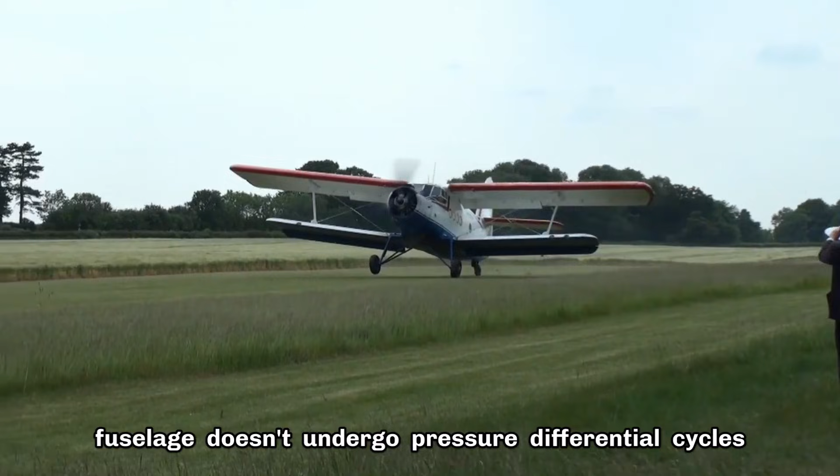If your budget is limited and you buy a general aviation plane or helicopter, you don't need to worry about lifespan because these fly at lower altitudes. They usually don't need to be pressurized, so the fuselage doesn't undergo pressure differential cycles from takeoff and landing. Just do regular maintenance and replace any parts that break. If something breaks, just swap it out. For example, the famous air tractor AN2, known as the Y5 in China. Many of the ones flying are old planes that might even be older than you, and they are considered workhorses.

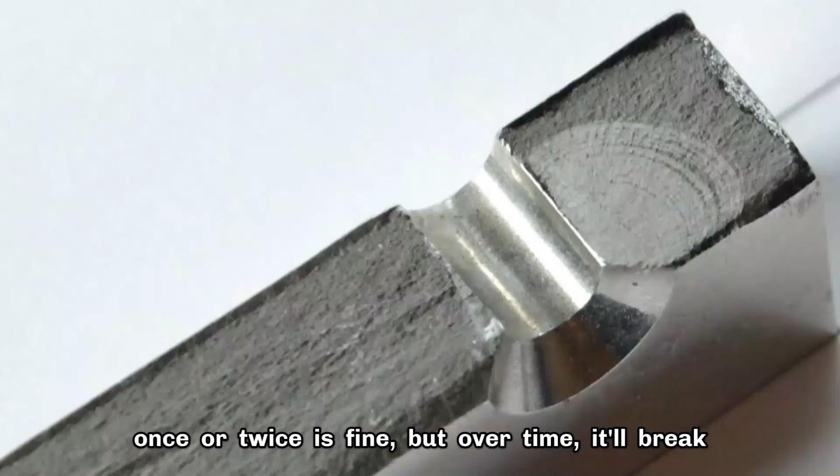But large commercial planes fly high and must be pressurized, so each takeoff causes the fuselage to expand, a process known as stress cycling. Material subjected to long-term or repeated loads develops small damages that gradually expand. In the end, it'll just snap with a crack. This is professionally referred to as material fatigue, or fatigue in English. Whether it's wood, rubber, plastic, aluminum alloy, or stainless steel, none can escape fatigue. Even if the stress of each cycle is far below the material's yield strength or ultimate stress, doing it once or twice is fine, but over time, it'll break.

Reading this, you might just burst into tears after coming home from overtime work. Even steel gets fatigued, let alone people.

Due to material fatigue, even regularly replacing parts or engines won't solve the fuselage fatigue issue. Unless you replace the fuselage, which raises a philosophical question: is a plane with a replaced fuselage still the same plane? Fatigue is a long-standing problem in mechanical design, whether in aviation, automobiles, or bridges. For instance, Delta Airlines in the United States lost the flaps of a Boeing 737 for 2 consecutive months in July and August. It's the first time I've seen a subscription-based flight accident. The reason for the flaps flying off is most likely metal fatigue.

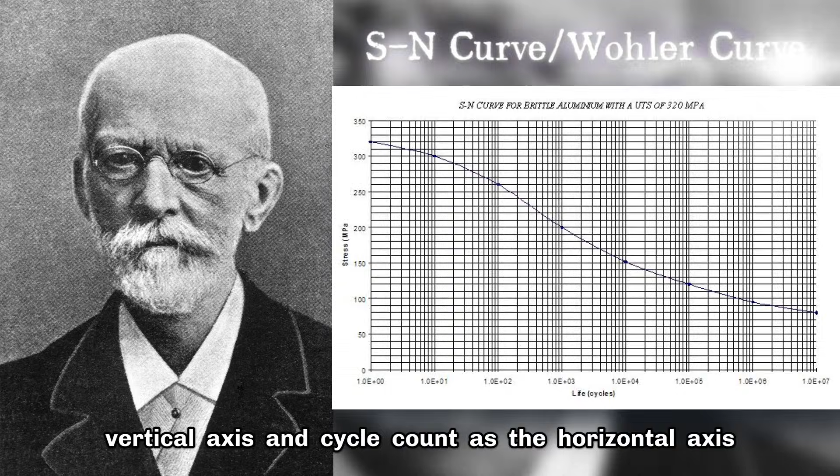Since the Industrial Revolution, engineers have been puzzled by train axles that break after a period of use. At the same time, they began a difficult search for answers. How long can this structure last before breaking? It wasn't until the mid-19th century that German engineer August Wöhler discovered that the lower the stress amplitude, the more cycles a material can withstand. He conducted numerous experiments and plotted the famous SN curve with stress amplitude as the vertical axis and cycle count as the horizontal axis. Over 100 years later, the SN curve remains the most basic and widely used method for fatigue analysis, especially for high cycle fatigue, which involves low stress cycles exceeding 10,000, and it has proven to be consistently reliable.

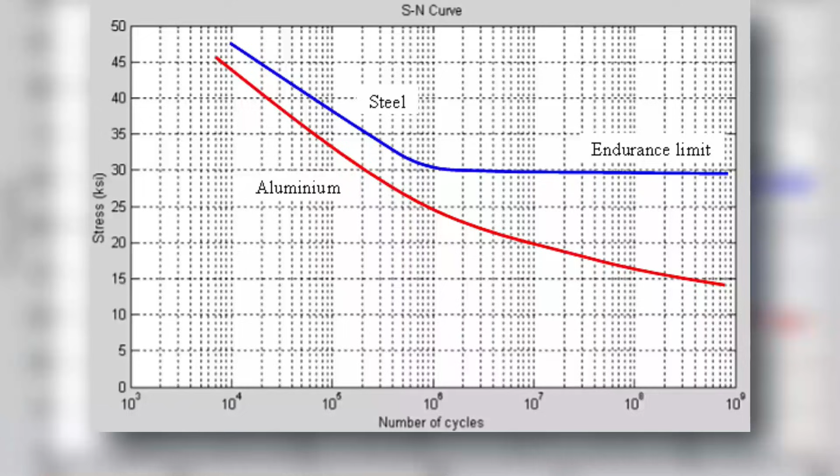Many industries have their own material manual. For example, China's aviation industry has an aviation material manual spanning 10 volumes and 11 million words. It's the wisdom crystallized from predecessors' battles with fatigue. Looking at the SN curve, have you noticed it declines more and more slowly? Especially for steel, it seems like there's an asymptote.

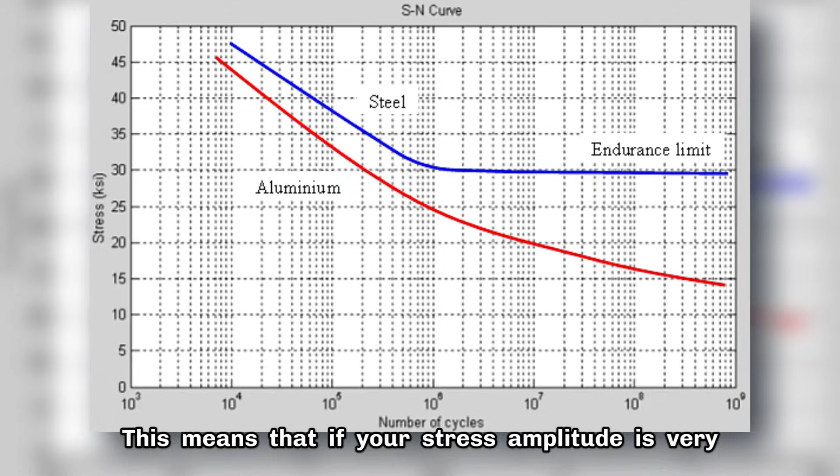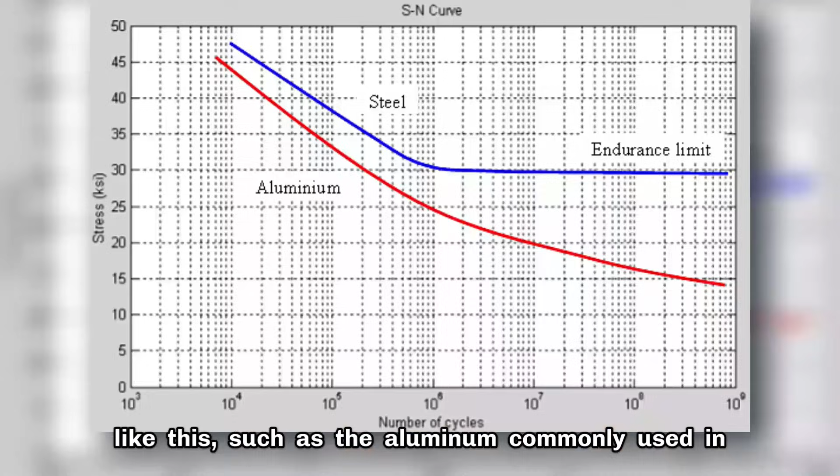This means that if your stress amplitude is very small, the number of cycles is nearly infinite. In other words, as long as the force on the material is small enough, you can assume it will never fatigue. But unfortunately, not all materials have SN curves like this, such as the aluminum commonly used in airplanes. There's virtually no asymptote, meaning that even if you apply the smallest force to aluminum, as long as the cycles are enough, it will eventually fatigue and crack. Anyway, with the material's SN curve, you can find the fatigue life based on stress. But how do you get the stress?